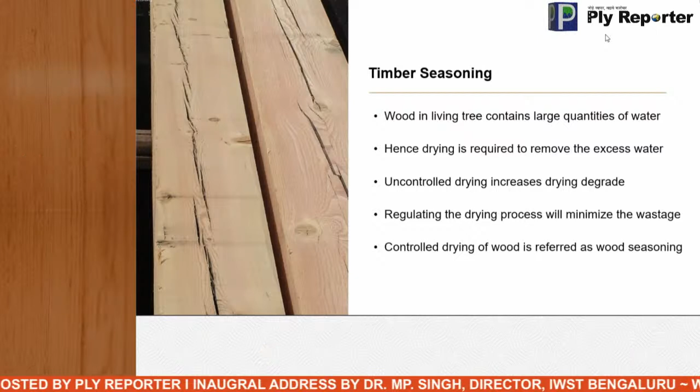Hence this water needs to be removed, because wood has all the inbuilt materials for sustaining living organisms, particularly fungus and termites. It contains cellulose, which on degradation can produce glucose, a source of food for insects and fungus. Oxygen is plentifully available, and if there is water, all three make wood very conducive for survival of any organisms. That's the reason wood can be degraded very fast if not protected properly.

So while there are different options to protect the life of wood, the easiest way is to eliminate one of these three requirements for survival of insects and fungus. Food source cannot be eliminated, and oxygen we cannot eliminate, we can just stop it with some coatings. So the easiest way is to limit the moisture availability.

If you can restrict the availability of moisture in the wood, then we can prevent the wood from a lot of organisms. So removing the moisture, although wood drying seems a very simple concept, if you don't control it, it can lead to unserviceable material.

Regulating the drying process is all about wood seasoning, and there is a slight difference between wood drying and wood seasoning. Anything can be dried, but at the end of drying we are not sure what material we'll get - it may be degraded or may be in good condition, depending on the wood material. When we talk about seasoning, we always control the drying process, so that the end product is degraded to the least possible extent.

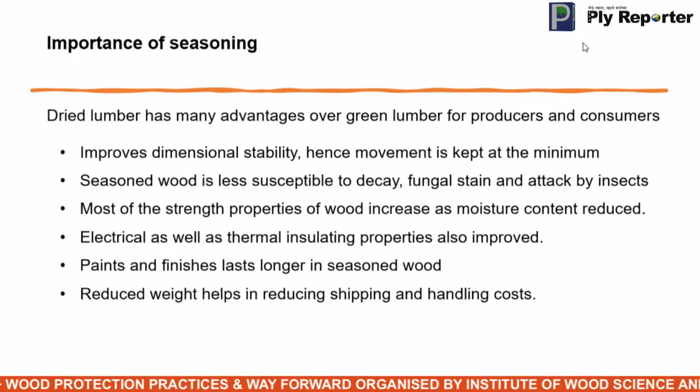As far as the importance of seasoning is concerned, it has many advantages, both from the perspective of producers as well as consumers. From the producer's perspective, if you remove the moisture, it can help in shipping and handling cost, because instead of carrying the wood, if you don't season it, you will be carrying a huge quantity of water from one place to another, which is of no use.

But besides that, as far as application is concerned, dimensional stability is the important aspect which can be taken care of by wood seasoning. Seasoned wood is very, very less susceptible to decay, fungal stain, and attack by insects. So when you talk about wood protection, even 50 to 60% of the protection measures can be taken care of by just following wood seasoning itself.

Interestingly, most of the strength properties increase as we reduce the moisture content of the wood, and the thermal and electrical properties also get improved.

Most paints and varnishes last longer if you dry the wood, because if you put all these finishes on wet wood, the life of the finishes will be very, very less.

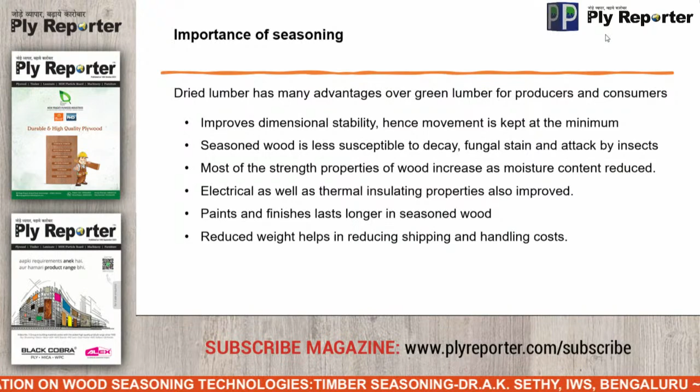Properly dried timber can be cut to very precise size, because the dimensional stability has already been ensured, so we can stick to our required dimensions, and it can be machined more easily and efficiently. The parts can also be secured very precisely with the help of fasteners, adhesives, as well as bolts.

Most of the drying degrades, like what we encounter during service, can be minimized if we follow wood seasoning practices before putting any wood into use. And the most important thing is, when you talk about wood preservation, most preservative treatment methods require very low moisture content in the wood. Hence, wood seasoning is one of the prerequisites for most preservative treatment, as well as fire retardant treatment methods.

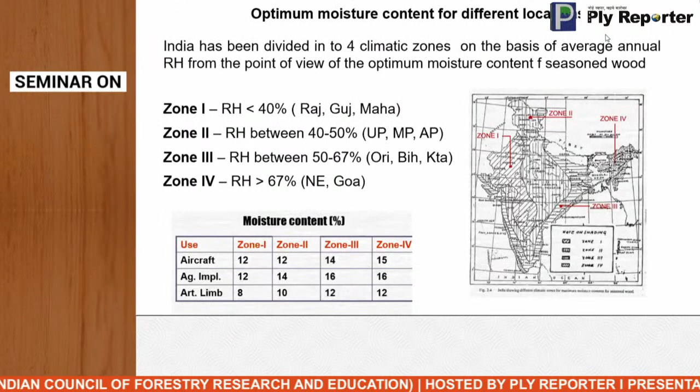If seasoning is very essential, then what is the optimum moisture level we should follow? Removing moisture in the beginning, when the tree is green, reducing the moisture from green condition to maybe 20-25% is not very energy intensive. However, if you go below 25%, for every percent decrease in moisture content, we have to put in a significant amount of energy. So what should be the minimum value to which we can suggest drying the timber?

This entire country has been divided into 4 zones: zone 1, zone 2, zone 3, and zone 4. These classifications are mostly based on the prevailing relative humidity in those areas. In zone 1, the average relative humidity is less than 40%, in areas like Rajasthan, Gujarat, and Maharashtra.

In zone 2, the relative humidity varies. This is not diurnal variability, it is the average variability for that particular area. So in zone 2, the range varies between 40 to 50%, then 50 to 67% in zone 3, and in zone 4, more than 67%.

So what is the necessity of this zonation? If you don't classify by zone, for example, if you want to use wood in zone 4, there is no need to dry the timber to a very low moisture content, because if you dry it, it is again going to absorb moisture from the surroundings. So we would be putting huge amounts of energy to remove the moisture, but that energy gets wasted, because the wood will again absorb moisture from the surrounding.

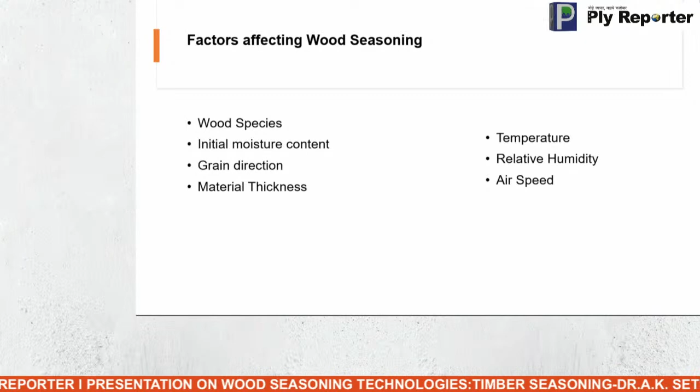When we talk about material factors, they are nothing but the wood species, their initial moisture content, how the sample has been cut, and the material thickness, because thicker the material, it will always be difficult to dry. We don't have much control on all these aspects except material thickness, but when we have a specific end use, we don't have a choice for material thickness either.

So the species, that is the material, is already fixed. We have only control over the processing parameters during seasoning, that can be temperature, relative humidity, and air speed. These are the primary controlling factors we always regulate in the drying kilns to have a better drying material. The species we cannot change, the material properties we cannot change.

However, the species have been classified into different categories depending on their seasoning behavior. They are classified as class A, class B, and class C, depending on how easily we can dry the species. Depending on the refractoriness of the species to drying, the species have been classified, and it's already been enlisted.

So whenever we take any species for drying, the desired protocol may be followed. No need to develop the protocol or schedules every time. It's already there. If you know the species, we can refer to the schedules and follow the schedule practices, so that we can have a material with better properties with less degradation.

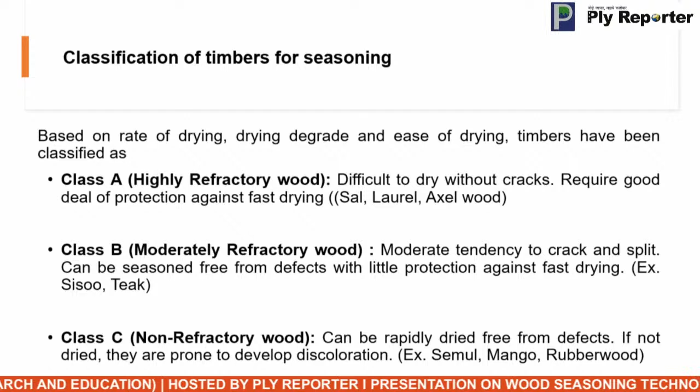But as I mentioned, the external factors where we can control, the combination of these three factors like temperature, humidity, and air speed, can be very complicated if somebody wants to start a drying process. So in order to avoid those complications, seasoning schedules have already been developed based on the species as well as the refractoriness. There are 8 schedules already recommended in the Bureau of Indian Standards, IS 1141/1993.

These schedules have been optimized for each species of timber, and the timbers have been classified into different groups. Depending on the class of timber, we can select the schedule. So a schedule is basically an optimum set of conditions between temperature and relative humidity with respect to the moisture content of the wood.

So we have to just select the species and find out the suitable schedule and follow those schedules for drying. If you follow this, at the end, we can ensure that our material has been properly dried and has encountered very little degrade.

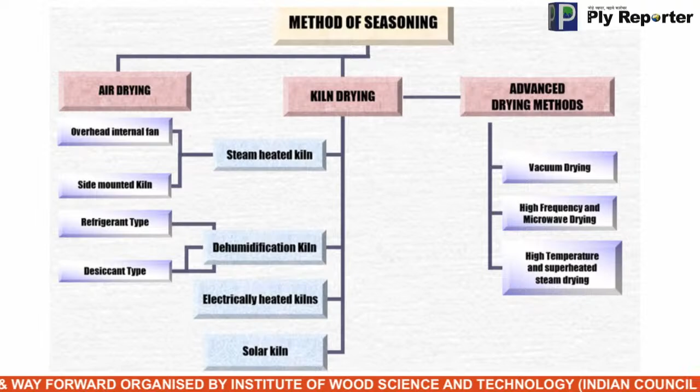But where we have control, we call it kiln drying. In kiln drying, as I mentioned, we have the possibility to control either the temperature, humidity, or even the velocity of air, because air works as a medium for taking out the water from the wood to the outside of the kiln. So there are different kiln drying methods.

In India, most drying is done with steam heated kilns, although dehumidification kilns are also used to a certain extent. Electrically heated kilns were used in the beginning, but because of higher cost of electricity, it may not be very economical. However, it can be clubbed with solar kilns in the form of a hybrid drying system. These are the traditional kiln drying methods we follow in India.

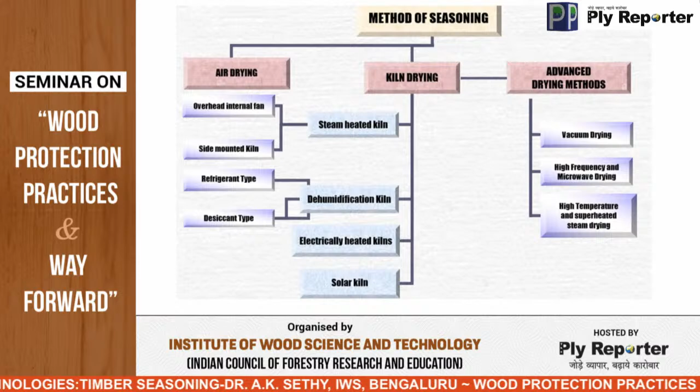Besides, there have been new inclusions into these processes like vacuum drying, where the pressure can be reduced inside the chamber to facilitate faster moisture removal. In recent years, we are also venturing into high frequency and microwave drying, where the material can be dried at a faster rate, but they have certain limitations because of capacity. Still, in India, I think it is in the nascent stage, and research inputs are needed to make it commercial. So the first and easiest way to dry timber is by air seasoning.

As I mentioned, in air seasoning, all the natural parameters available in the atmosphere, like temperature, humidity, and wind speed, are used for drying timber. Because it is air dried, we are not putting any extra energy in terms of heating or circulating air. This is the most economic method of drying. However, as I mentioned, we don't have control, so sometimes the process can be very long, and it can take 3 to 6 months depending on the place where it is practiced.

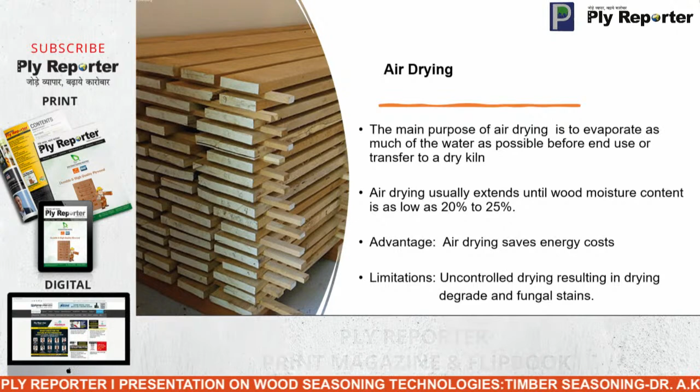But in the Indian context, being a tropical country, we have good access to solar radiation, and the average temperature in most parts of the country is around 25 to 30 degrees centigrade. So this can be utilized. The advantage of tropical climate can be utilized for practicing air drying, which can be more economical.

There are different air drying sheds depending on the refractory classes, as I mentioned in the beginning. These drying sheds can be fabricated at very low cost, and depending on the species used and the location, the shed type can be decided to help facilitate air drying.

But as I mentioned, in kiln drying we have all the control measures. We have regulation for temperature, humidity, and air speed. In most of the schedules in Indian standard, they range between a temperature of 38 to 68 degrees. However, in other countries, even high temperature drying up to 100 degrees can be followed for faster drying. So kiln drying definitely provides better opportunity to control the drying process, so that we minimize drying time and maximize recovery without much degradation.

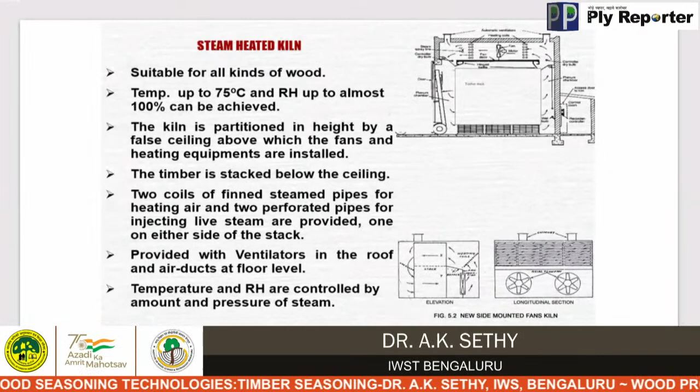As I mentioned, the most prevalent drying kiln followed in India is steam heated. As the name suggests, the heating medium is steam, and we can achieve temperature up to 75 degrees, and humidity up to 100 percent. With these two combinations, we can control the drying process depending on the species used. So drying time can range from 8 to 15 days depending on the species as well as the temperature we are following.

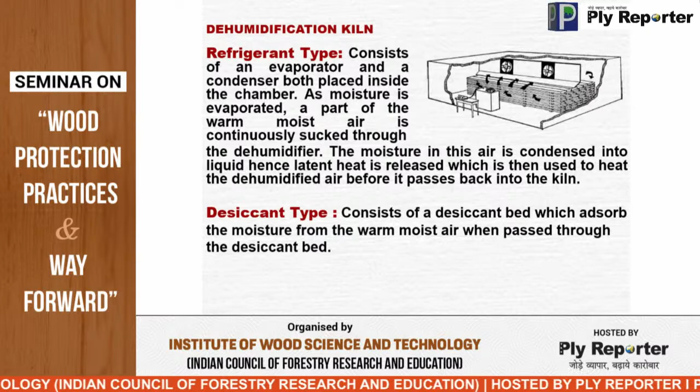Dehumidification drying is a little bit advanced version of kiln drying, because here instead of venting the energy, when we remove moisture from the wood in a normal kiln, we vent the moisture outside the chamber, and in the process we also vent some of the energy out. So in the dehumidification kiln, we trap part of that energy inside the chamber, so that while venting out, we don't lose most of the energy. That's why it is more energy saving compared to normal traditional drying methods.

There are different types of dehumidifiers available based on refrigerant or desiccant types, and these are commercial, available in the market.

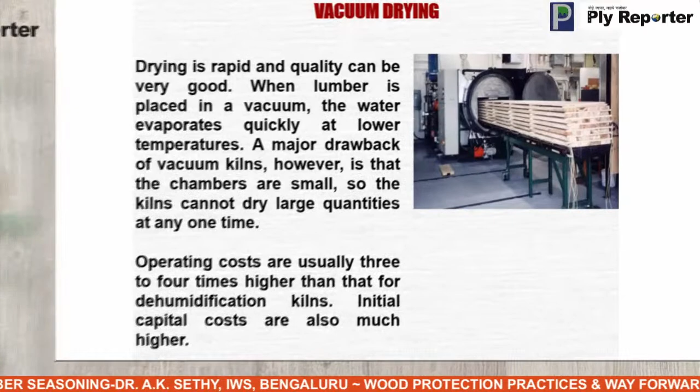Vacuum drying is one of the fastest drying methods, and we can dry the timber even in 3 to 4 days depending on the species. The time can be substantially reduced by 30 to 40%. But the operating cost is also a little bit higher, because the initial cost is also a bit high.

Besides these three methods, as I mentioned in the beginning, there are other different methods like high frequency drying, which can have the advantage of both drying as well as sterilizing the timber from the perspective of quarantine. But these methods are still in the initial stages, so a lot of research inputs are needed to make these processes commercial.

So if you talk about the comparative performance of different types of kilns, of course air drying can take more than 3 to 6 months, but steam heated kilns take 10 to 15 days. Dehumidification drying, again, is 12 to 18 days.

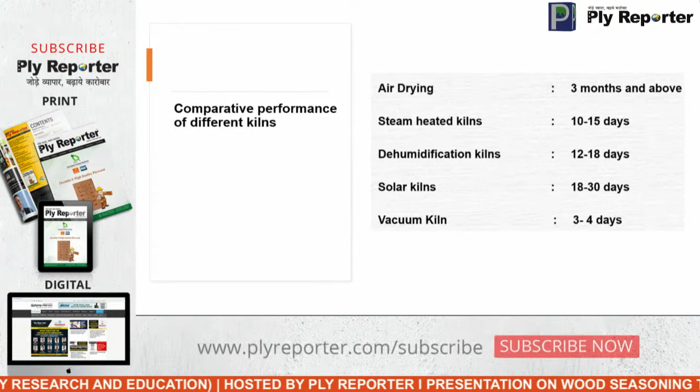Solar kilns, this is one of the potential methods I'll just highlight at the end. This can be one of the solutions for the Indian context. Although the drying time is more, it can prolong for 18 to 30 days, but this can be minimized by combining with a hybrid system.

And vacuum kiln drying takes only 3 to 4 days. So this is a comparative performance of how the different kilns behave when we dry timber.

As far as energy consumption is concerned, conventional drying methods are a little bit more energy intensive. For unit per kg of water, they need around 1.3 to 1.4 kilowatt hour of energy, with an energy efficiency of around less than 50%.

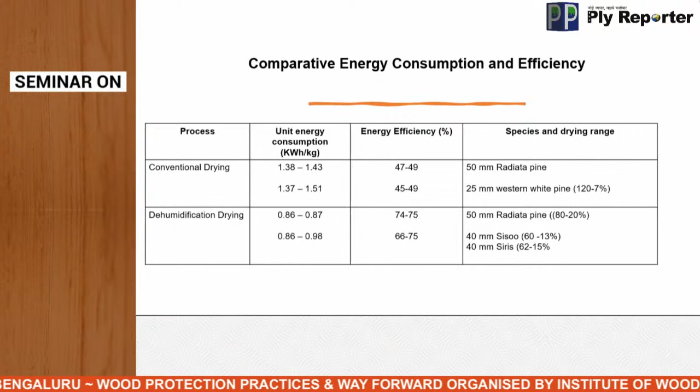But when you talk about dehumidification drying, the energy efficiency can be around 75%, with energy consumption of only 0.86 kilowatt hour per kg of water removal. So these are some of the benefits when you deal with wood seasoning.

Although we know that seasoning is the foremost step in wood processing industries, I don't think it is followed in true spirit, because there is lack of information about how to season the wood and what the Bureau of Indian Standards says. So sometimes we dry the timber and feel it has been dried properly, but we never know what is the moisture distribution in the timber itself, because if the distribution is not good, when we start using it, all the problems can start again.

So we are putting energy, but at the end we won't get material of desired quality, what we always aim for. Bureau of Standards always recommends what should be the distribution pattern in the dried material, but I don't think hardly any small industries are following the exact practice, because we always remove the moisture, but we don't know how the moisture distribution pattern is and how the stresses are built up.

So when you talk about opportunities, of course this is most important, but the most energy intensive processes in timber utilization can be 50% of the total energy consumed in the entire wood processing industries. Because of that, sometimes we neglect these processes to save cost in terms of energy.

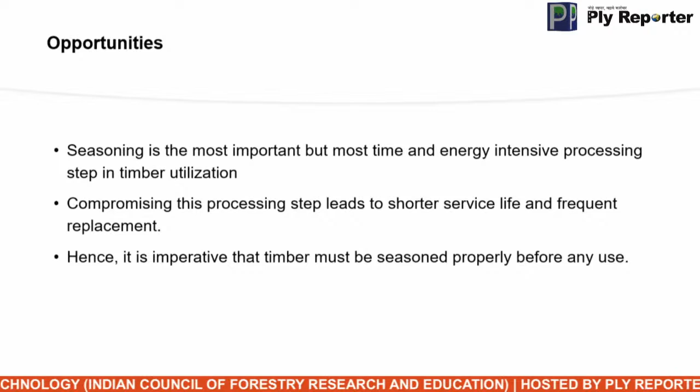However, if we compromise the processing steps, we'll always end up with material of poor quality, which will have a shorter life and need frequent replacements. So indirectly, it can have implications on forest conservation also. Hence, it is imperative that we should treat timber properly before putting it to any utilization.

But when everybody, all companies or individuals, should demand for seasoned material, then the next question comes: how can we facilitate these processes. It is interesting to mention that being a tropical country, we have access to 5,000 trillion kilowatt hour of energy incident over Indian land area, with an average of 4 to 7 kilowatt energy per square meter. So this is a beautiful avenue which can be tapped for drying.

It can be done by different methods. For instance, we can install solar cells, heat water, and circulate it for seasoning. We can also go for the traditional solar kiln method, where chambers are built on the concept of the greenhouse effect. So there is good potential that solar energy can be utilized, because as we know, energy is the only inhibiting factor for drying.

If that energy can be managed from renewable sources without putting much cost, then it can be promoted easily. So there is huge potential that renewable energy can be utilized in wood processing, not only in seasoning, but even in other processing fields.

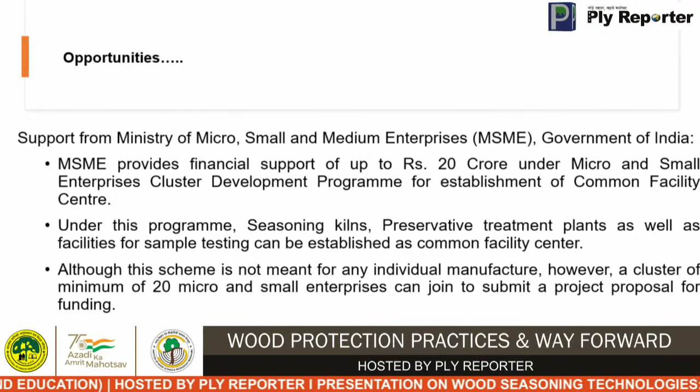And if that is not possible to some extent, there are possibilities from Ministry of MSME, Government of India, as our director has mentioned, to get funding and establish seasoning facilities. Not only seasoning, even all woodworking facilities, but from a preservation perspective, seasoning and wood preservation are very, very important.

MSME provides financial support up to 20 crore for development, based on a cluster development program. Although these programs are not meant for individual manufacturers, if there is a cluster of around 20 micro, small and medium enterprises, with a group of minimum 20, they can join, make a consortium or association, and approach MSME for financial support for development of facilities like wood seasoning kilns and preservation plants.

And it can be a common facility center, so everybody can access those facilities and utilize them for processing wood for better durability.

In this context, IWST can provide most of the technical support in preparing the project, particularly pertaining to wood seasoning and preservation. Once the project is funded and installed, it can be sustainably utilized by all the members, and there is no restriction on the maximum number of participants who can join this consortium.

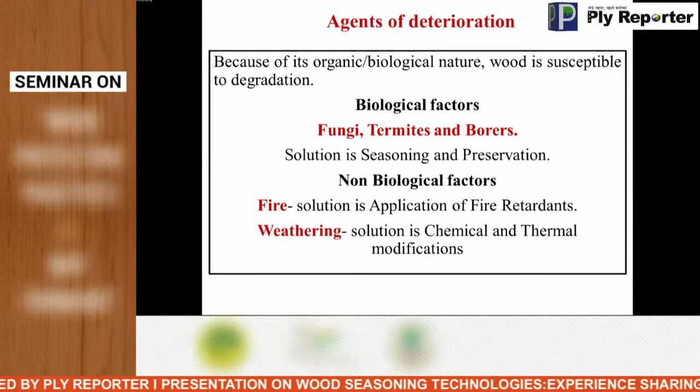Agents of deterioration: because of its organic or biological nature, wood is susceptible to degradation. Biological factors are fungi, termites, borers - the solution for this is seasoning and preservation. Non-biological factors include fire, where the solution is application of fire retardants, and weathering, where the solution is chemical or thermal modification.

Need for preservation: why do we have to preserve wood? Natural durability is the inherent ability of timber to resist degradation. In most timber species, sapwood is non-durable and needs preservation. Non-durable timbers, when suitably treated, would give adequate life under service conditions.

Wood preservation is the art of preserving timber against fungi and insects. Wood preservatives are chemical constituents that when applied to wood make it resistant against fungi and insects. It forms a very important part in the processing of timber, thereby conserving the material resources of the country.

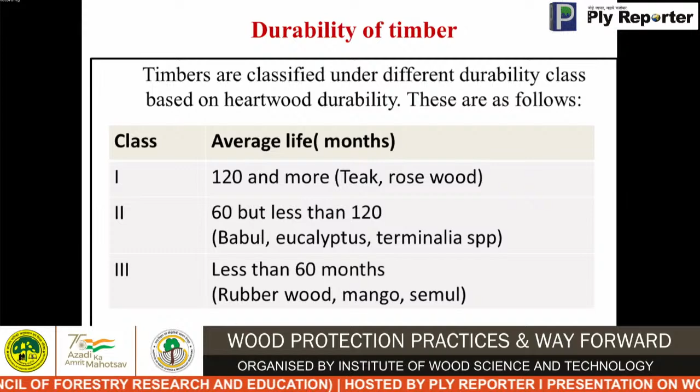Durability of timber: timbers are classified under different durability classes based on heartwood durability. Class 1 is 120 months and more, with higher durability - examples are teak wood and rosewood. Class 2 is 60 but less than 120 months, such as babul, eucalyptus and terminalia species. Class 3 is less than 60 months, such as rubber wood, mango and semul.

Selection of preservatives is very important. It depends upon the properties of the wood to be treated, the anticipated service life, and the properties of the chemical formulation. The wood preservative formulation must be toxic to fungi, termites and borers. It should be chemically stable, safe to handle, should not have any corrosive properties, and the permanency of the wood preservatives in the treated wood should be high.

So what types of preservatives are generally used? The oil type should be applied for dry wood, not green wood. That is coal tar, creosote is an example. Organic solvent preservatives for dry wood include copper and zinc naphthenates.

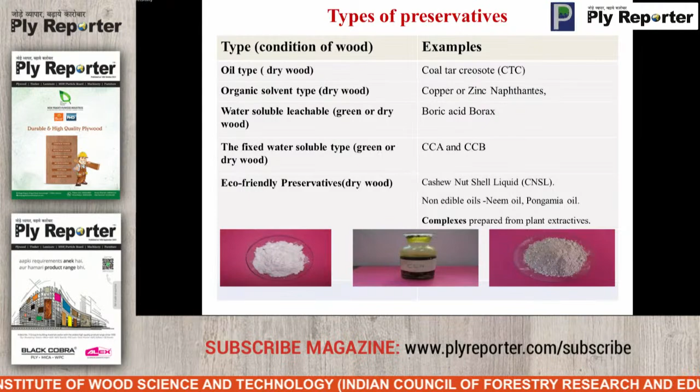Widely used water soluble preservatives are chromated copper arsenate, chromated copper boric acid, acid copper chromate, alkaline copper, quaternary compounds, borates, and zinc compounds. These are all generally used water soluble preservatives.

What are the advantages? These preservatives can be transported in a solid or concentrated form. Wherever we are treating, we can dilute it. They can be dissolved with the cheapest of all solvents, that is water. They are very effective against both fungi and insects. They leave the wood in a clean condition and it is not unpleasant to handle.

There are new generation wood preservatives. Borates include formulations prepared from sodium tetraborate, sodium pentaborate, boric acid, but the most common form is disodium octaborate tetrahydrate, and Zyvoc, which is a composite of zinc, boron, copper and azoles. These are the new generation wood preservatives.

Ammonium-based preservatives are also there. Alkyl ammonium compounds are new biocides effectively used in New Zealand, Europe and America. They have both fungicidal and insecticidal properties. Combination of alkyl ammonium compounds with copper and ammoniacal solutions improves the performance of timber in ground contact. This formulation gives protection equal to that of CCA.

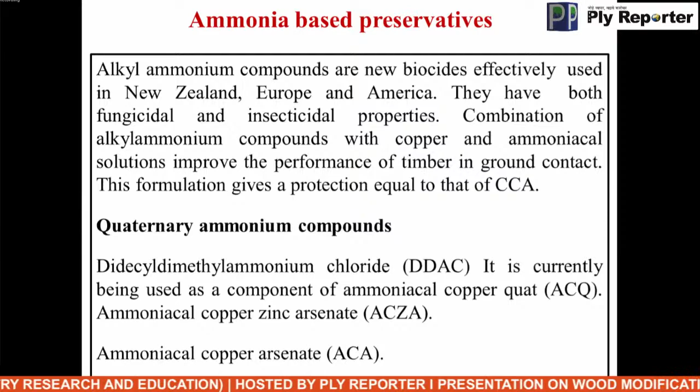Quaternary ammonium compounds, that is ACZA and ACA, ammoniacal copper zinc arsenate and ammoniacal copper arsenate. Micronized copper azole, MCA, is a waterborne dispersion of submicron particles of copper compounds in azole. They have lower copper leaching form in treated wood, low corrosiveness to metal fasteners and connectors, lower solubility, and are relatively less expensive.

Recent developments are in nano preservative coating systems. Nano based coating provides superior UV and weather resistance. It is easy to clean, antimicrobial, scratch and abrasion resistant. Nanoparticles used for wood preservation and UV resistance include nano zinc oxide, nano copper oxide, and nano titanium oxide.

Wood consists mainly of cellulose, which is combustible. So fire retardants are generally prepared from mono and diammonium phosphates, ammonium sulfate, borax, boric acid, zinc chloride, nano silicon oxide, and mineral materials like nano clay can be used as fire retardants.

Eco-friendly preservatives include natural wood preservative formulations from cashew nut shell liquid (CNSL) with inorganic components like copper, and eco-friendly preservatives based on seed oils and plant extractives. Pongamia oil shows promise. Wood and bark extractives of eucalyptus species and Lantana camara with inorganic components can be used as eco-friendly wood preservatives.

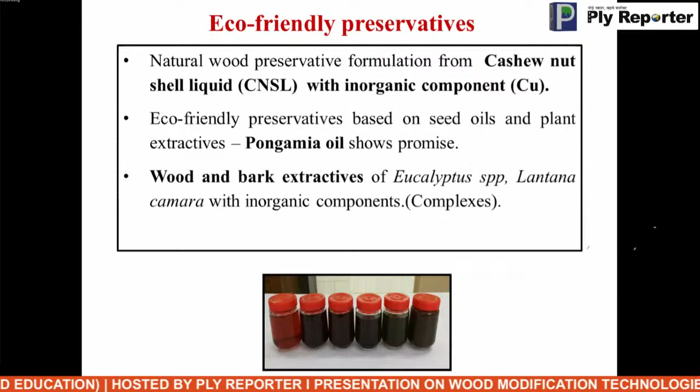The selection of the appropriate preservative and treatment method depends on various factors. Condition of the wood, whether it is green or dry, that is whether it has more moisture content or is dried or just felled wood, we have to see. Treatability factor of the wood must be considered. Treatability of hardwood is classified A to E, from non-refractory to refractory, that is easily treatable to very difficult to treat.

End applications matter, whether it's used in ground contact, exposed to atmosphere, or under cover, structural or non-structural, handicraft unit or food containers. We have to select the preservative based on the end use. Quantity to be treated and available time also must be considered, how much quantity we have to treat. Based on that, we choose the methods of preservation and the preservatives.

Wood preservative treatment methods are: first, prophylactic treatment, a basic remedial treatment. Second is diffusion process. Third is dipping or soaking. Pressure treatment is for dry wood. Sap displacement method is for green wood. Boucherie method is for green wood. These are the general preservative treatment methods.

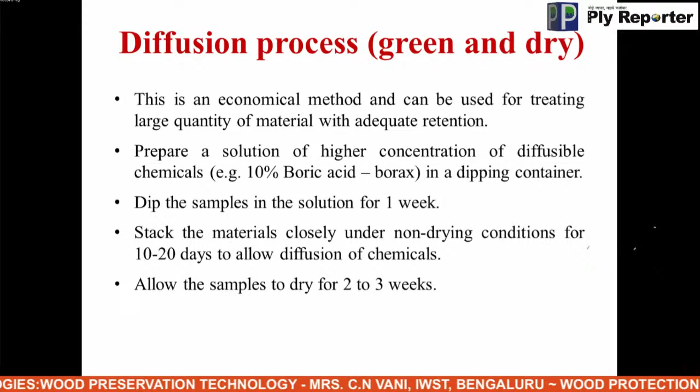Diffusion process can treat both green and dry wood. This is an economical method used for treating large quantities of material with adequate retention. For this, prepare a solution of higher concentration of diffusible chemicals, for example 10% boric acid-borax, in a dipping container. Dip the samples in the solution for one week. Then stack the materials closely under non-drying conditions for 10 to 20 days to allow diffusion of chemicals. Allow the samples to dry for 2 to 3 weeks.

Next is the pressure method. The main steps followed in the full cell process are: preliminary vacuum period, fill the cylinder with preservatives, build up the pressure, note the maximum pressure held, release the pressure, empty the cylinder of preservative, final vacuum period, and release the vacuum. The maximum pressure held depends on the species and its treatability.

Next, the Boucherie process. Dr. Boucherie of France developed this process for treating green timber or bamboo. This is the most commonly used sap displacement technique, where bamboo can be treated quickly in large numbers. It consists of a storage tank of 30 to 50 liters capacity where preservative solution is stored. At the bottom of the container, a main pipe is attached, connected with a divisible pipe with a stopcock and a rubber tube of different girth, where the pole is supposed to be attached.

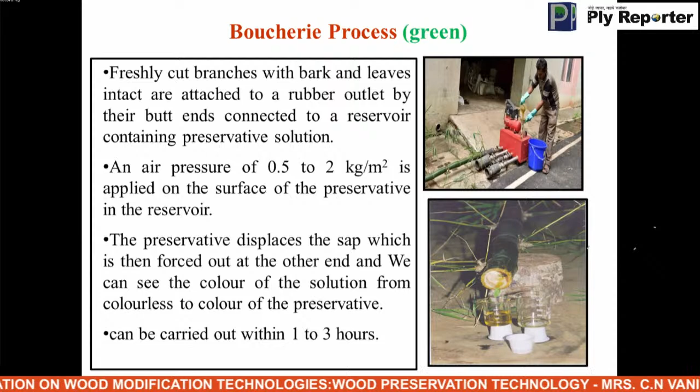This is for green condition only. Freshly cut branches with bark and leaves intact are attached to a rubber outlet, with their butts connected to the reservoir containing the preservative solution. An air pressure of 0.5 to 2 kg per square meter is applied on the surface of the preservative in the reservoir. The preservative displaces the sap, which is then forced out to the other end. We can see the color change from sap to preservative color, that is, colorless to the color of the preservative. This process can be carried out within 1 to 3 hours.

So we can see the color change, with the colorless sap dripping out and the color of the preservative appearing.

Advantages of pressure treatment over non-pressure treatment: deep uniform penetration and absorption can be achieved. It is a faster and more reliable process, more easily controlled and regulated, and conditioning time can be reduced.

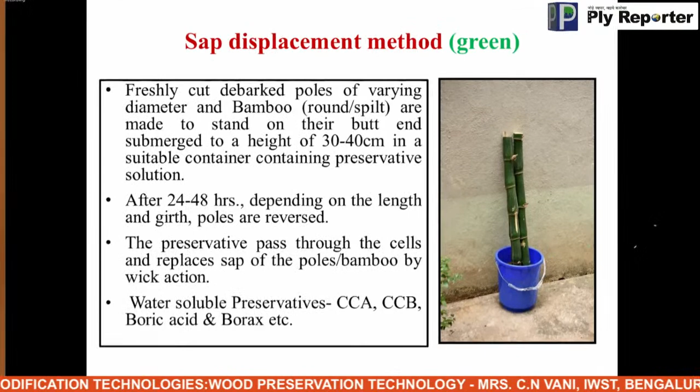Sap displacement method for green bamboos or green poles: freshly cut, debarked poles of varying diameter, round or split, are made to stand on their butt ends, submerged to a height of 30 to 40 centimeters in a suitable container containing preservative solution. Nearly one-fourth of the length of the bamboo should be submerged in the preservative solution. After 24 to 48 hours, depending on the length and girth of the poles, it has to be reversed. If the length is less, 24 hours is enough; if the length is more, 48 hours is required. The preservative passes through the cells and replaces the sap of the poles by wick action.

Water-soluble preservatives like CCA, CCB, boric acid or borax can be used here. Organic solvent or oil type preservatives cannot be used; only water-soluble preservative is to be used.

Next, advantages of the sap displacement method: this method is very simple, avoids elaborate treatment procedures, treatment plant and skilled manpower, and can be carried out at the felling site itself. Highly refractory species like casuarina, eucalyptus and bamboo can be easily treated by this method.

After all these processes of treatment, conditioning is a very important part. After preservative treatment, samples should be allowed to dry under the shade for proper fixation of preservatives, stacking properly with crossers for uniform air circulation to be maintained. This will ensure the fixation of the preservatives inside the wood.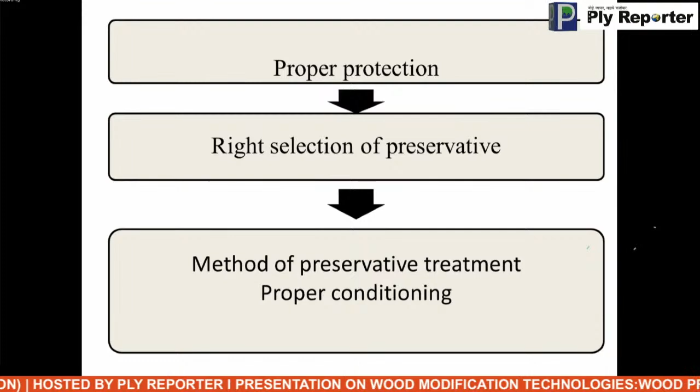So for proper protection, right selection of preservative, method of preservative treatment, and proper conditioning are the very important steps. If you follow these three methods, then proper protection is achieved. Thank you very much.

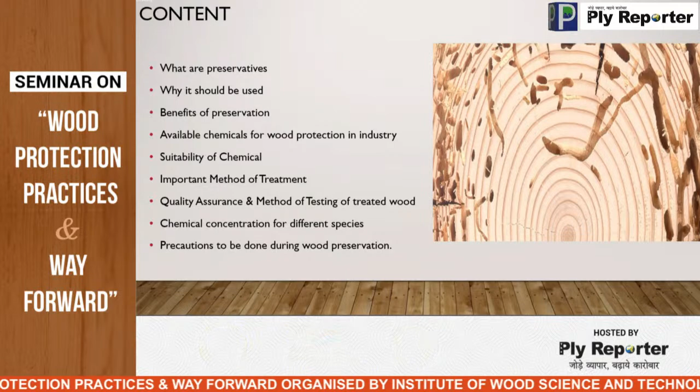So I think the previous speakers and previous panelists already shared their experience. So here I will share one presentation, and Mrs. Bani also shared this in her presentation. What is the good practices and what should be done in the industry? As already discussed, that industry is not following the good practices, and very few industries are following the system, following the good practices. So here I would like to share some good practices which industries should follow. And as already Mrs. Bani shared her presentation, and she has already mentioned about some few basics, so I'll skip there, and I'll be focusing more on my experience and what the industry practices.

So in my presentation, it includes what are preservatives, and I'll be talking very less about it because already it is mentioned. Why it should be used, as already mentioned. Benefits of preservation. Available chemical for wood protection in industry, like there is a lot of chemical available in the industry, but what industry is following, what industry is using, and the suitability of chemicals, it is also covered, but I'll share my view here. And important method of treatment, what industry is following. Especially I'll be talking about North India and the export industry, furniture exporting industry, because most of these good practices are being followed by export industry because of their clients. Like as already Mr. Anil said, that because of exporting, the importers from the USA and Europe, they are pushing our industry to follow this type of good practices and follow the systems.

Like again, important, quality assurance and method of testing of treatment wood. Like as Mr. Anil also said, quality assurance, how we assure the quality of the preservation, the treatment method, whether we are doing the right process or not, and the method of testing, how we will test, because this is a scientific approach. Otherwise the industry just has a preconceived mind that okay, it is done. And then the workers, it depends on the workers' experience. If the worker is experienced, then the quality of the treatment will be good. If the experience is not good, then it will affect the quality of the treatment also. And the chemical concentration for different species, and some precautions to be done during preservation.

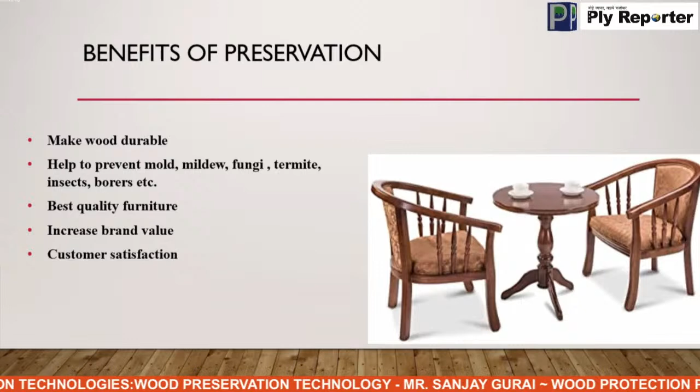I'll share some benefits: to make the wood durable, to help prevent mold, mildew, fungi, termites, insects, borer, etc. These are the decaying agents, as well as to enhance the quality of the furniture. Because as a wood industry, when we are selling furniture and it is going to the customer and they are using it, maybe after 6 months there is a borer in the furniture, then the customer dissatisfaction will be there. So to increase the quality, we should prevent the wood from this type of wood fungi and wood insects, and we need to preserve the wood.

Wood preservation should be done. It also increases the brand value.

Why are industries in North India doing these practices? Because brand is involved. Some international brands, as you know, West Elm, Pottery Barn, Crate and Barrel, Zara Home, H&M - all these brands are pushing their exporters, pushing their vendors to follow this system.

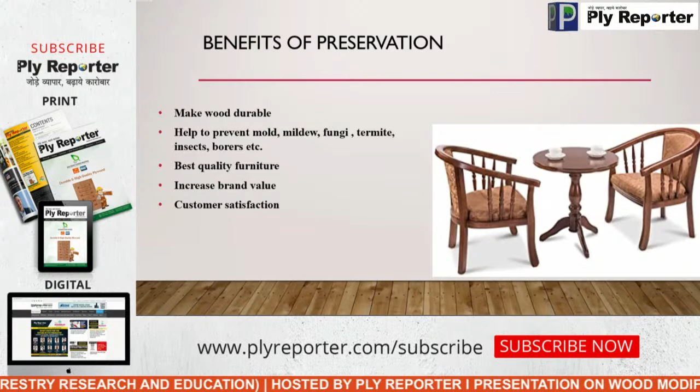I would say that only when the importers are pushing, when the brand is pushing us, then only we'll follow the practice. This is not good. Actually, all industries should follow these practices.

As well as there is another benefit, that is customer satisfaction. When we are selling furniture to our customers and they are satisfied, then it is good for the brand, good for the company also. This is actually a sustainable method of doing business. Mrs. Bani has already said what is wood.

I will tell only the available chemicals which are used in industry. I will not go into the details. Mrs. Bani has already mentioned what chemicals are available. I will only focus on those chemicals which the industry is using.

Creosote oil - industry is using this, like wood preservative oil, linseed oil preservative - some industry is also using this. And in North India, for exporter industries of solid wood furniture, biflex is widely used. And recently, for the last 5 years, people have shifted from biflex to few other chemicals.

I won't say that everyone has shifted. A few industries have shifted to borates, like disodium octaborate tetrahydrate. I'll mention why here - I'll be sharing in a later slide why people are using disodium octaborate now, and a few industries are using boric acid also.

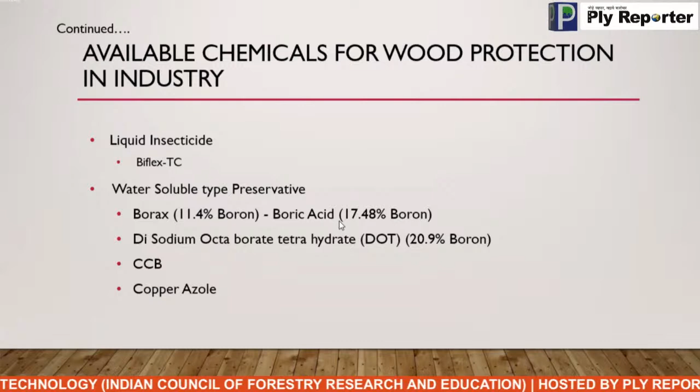Next I will share some important method of treatment. Here I will only focus on the full cell method. This is the method which industry should follow. According to the available methods, it is the best method I can say, and industry should follow this one. Definitely there are some disadvantages also - it is capital intensive, but still I'll recommend that this process should be followed.

Without pressure treatment, brushing, spraying, dipping is the process industry follows, but as industry is growing, we should follow the pressure treatment method.

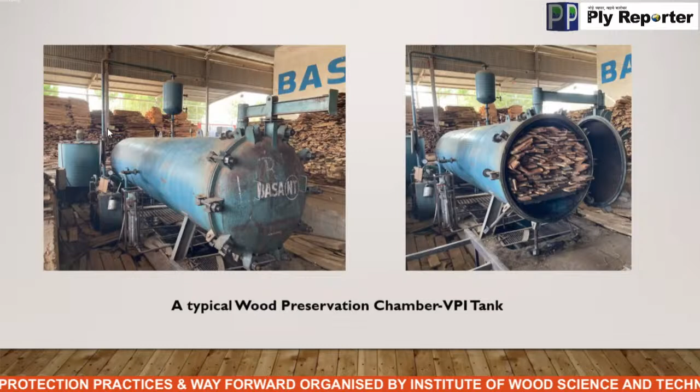First the chamber is loaded, then a vacuum is applied, around 600 mm of Hg, for 30 minutes. After that, when vacuum is applied, chemicals are impregnated - there is a tank and a lock here. After vacuum is done, chemical impregnation is done. After chemical impregnation, the lock is again locked, and pressure is applied.

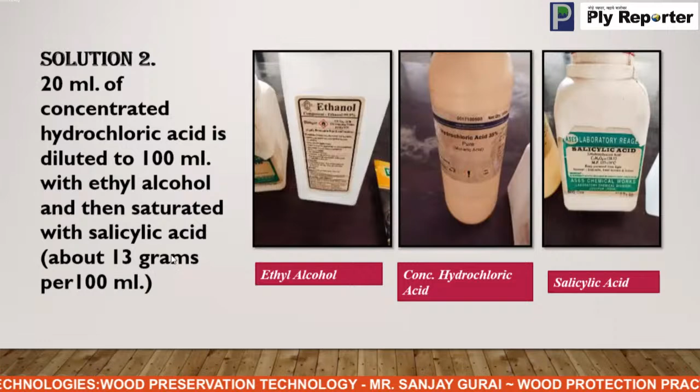Then you can say that wood is treated properly. If it is not, as in the earlier photographs I showed, if it is not turning to red color, then it is not treated properly. So this is the practice which I will say every industry should follow for better quality control, like retention, calculation of retention.

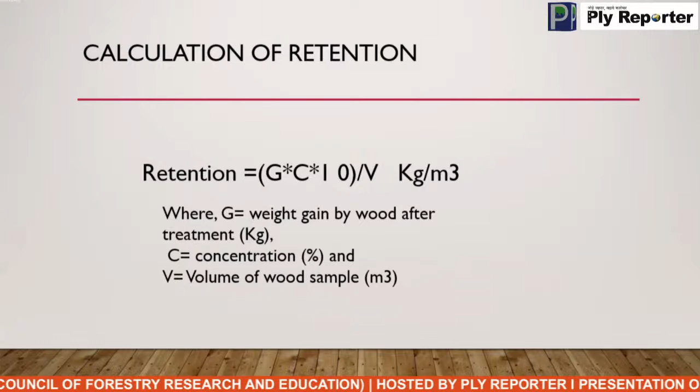इंडस्ट्री के पास रिकॉर्ड होना चाहिए कि वो जितने भी लॉट्स की रिटेंशन कर रहे हैं उसकी डेटा मेंटेन होनी चाहिए, कि डेली डे टू डे क्या रिटेंशन रहा है, वेदर इट इज एक्चुअल, मतलब रिटेंशन सही से हो रहा है कि नहीं हो रहा है।

ये भी फॉलो होना चाहिए। अनिल जी का जो कंसर्न था कि इंडस्ट्री में शुरू में 3% या 4% से कंसंट्रेशन किया जाता है, अगले दिन जब टॉप अप कर रहे हैं तो वेदर द केमिकल कंसंट्रेशन इज मेंटेन्ड और नॉट, इसके लिए एक बहुत सस्ता इक्विपमेंट है - हाइड्रोमीटर - बट मोस्ट ऑफ द इंडस्ट्री इज नॉट यूजिंग दिस। सिंपल हाइड्रोमीटर से पता चलेगा कि कंसंट्रेशन एक्चुअल है या रिक्वायर्ड कंसंट्रेशन से कम है।

सबसे लास्ट में कुछ प्रिकॉशंस बताता हूँ जो इस पूरे प्रोसेस में लेने चाहिए। जैसे कि जो VPI टैंक है उसका प्रॉपर टाइमली एंड रेगुलर चेक होना चाहिए कि उसके अंदर प्रेशर कितना जाता है, क्योंकि अगर कोई एक्सीडेंट होता है तो इट कैन क्रिएट अ ह्यूज हार्म। सो ये एक चेक पॉइंट होना चाहिए - टाइमली चेक करना और उसका कैलिब्रेशन भी करना, जैसे प्रेशर गेज है, वैक्यूम गेज है, उसका टाइमली कैलिब्रेशन इट शुड बी डन।

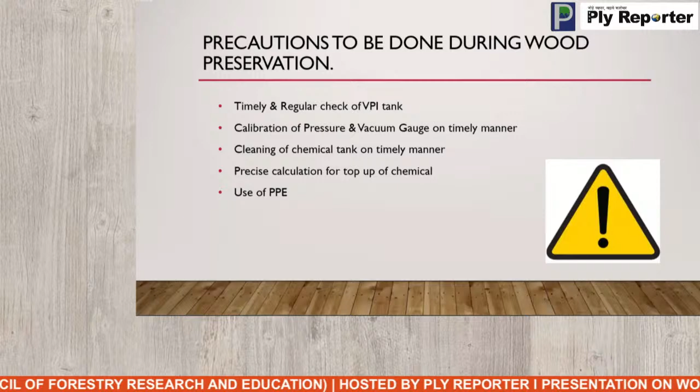एंड क्लीनिंग ऑफ केमिकल टैंक ऑन टाइमली मैनर। लोग क्या करते हैं कि एक दिन ट्रीटमेंट किया, क्योंकि जो एक्सेस केमिकल है एक बार भरने के बाद दोबारा उसी टैंक में जाता है, तो वुड के अंदर जो गंदगी थी, जो सॉडस्ट था, वो दोबारा वापस चले जाते हैं। तो अगर उसकी क्लीनिंग नहीं करेंगे तो नेक्स्ट टाइम जो केमिकल आएगा उसमें इम्प्यूरिटीज बहुत ज्यादा हो जाएंगी, जो पेनिट्रेशन को हिंडर करेगी, अल्टीमेटली क्वालिटी कंट्रोल में जो डिजायर्ड क्वालिटी चाहिए वो मिलेगी नहीं।

सो ये सब क्लीनिंग टाइमली होनी चाहिए, एंड प्रीसाइज कैलकुलेशन ऑफ टॉप अप ऑफ केमिकल। जैसे अनिल जी ने कहा है कि जब नेक्स्ट दिन, आज मेरे 3 साइकिल्स हो गए पूरे दिन में, तो नेक्स्ट डे जब मैं केमिकल का टॉप अप करूंगा तो सिर्फ पानी नहीं ऐड करूंगा। जैसे 1000 लीटर का पानी है, तो हो सकता है पूरा पानी खत्म नहीं होता, तो 100 लीटर पानी अभी भी नीचे पड़ा है।

तो दैट इज 100 लीटर केमिकल मिक्स्ड वाटर है, और जो 900 लीटर पानी ऐड कर रहा हूँ, उस 900 लीटर के लिए जितना केमिकल मेरे को ऐड करना है, मैं उतना ही करूंगा। तो यहाँ पे क्या होता है कि लोग 1000 लीटर के लिए कैलकुलेशन है कि 2%, तो गलती से 1000 लीटर के लिए कर देते हैं, लेकिन कैलकुलेशन 900 लीटर के लिए होना चाहिए - कि ऑलरेडी 100 लीटर केमिकल मिक्स्ड पानी मेरे पास है, सो मुझे बस 900 लीटर पानी के लिए कैलकुलेशन करना है।

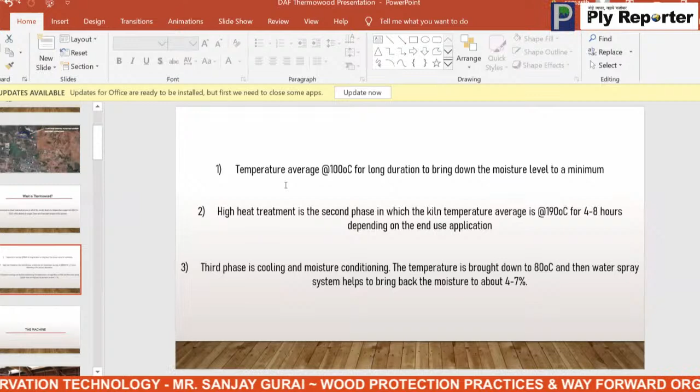And once you do this treatment, it is a three-step process. Basically, initially, the average temperature is kept at around 80 to 100 degrees for almost 13 to 15 hours, so that the timber doesn't immediately start cracking and doesn't bend and warp, because it needs to stabilize. The moisture needs to come out of the timber slowly and accurately.

Once we are sure that the timber has stabilized in the chamber, we increase the temperature from 100 degrees to almost 190 to 230 degrees, where we keep it for 4 to 8 hours, depending on the species that we are doing.

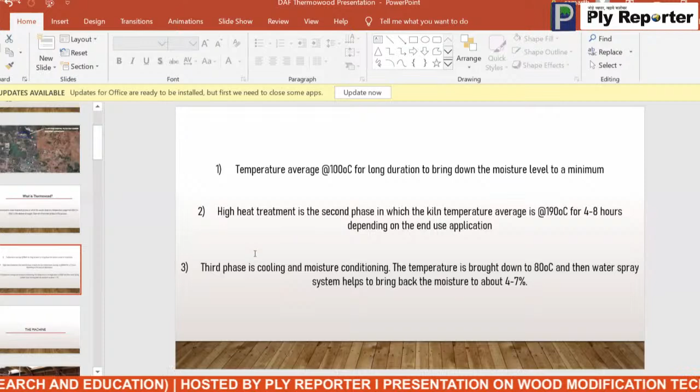Once that is completed, we then start the third phase, wherein we start cooling down and moisturizing it. Remoisturizing it is one of the most important factors, because if we do not remoisturize it, the timber generally tends to become very brittle and has the tendency to break up. So remoisturizing is done during the cooling period.

The better part of the treatment is you can actually control the color of the timber. You can choose what kind of color that you need. And also the better part is the color that is being done is completely uniform. It doesn't have patches or something like that. The color is completely uniform throughout the length and width of the species.

And you can choose whatever color you want.

The benefits, as people know, are that lowered equilibrium moisture content of thermowood makes it dimensionally very stable, and the material retains its shape far better than untreated wood, and it retains itself for a very long period of time. The outstanding dimensional stability allows thermowood to be successfully used in all climates.

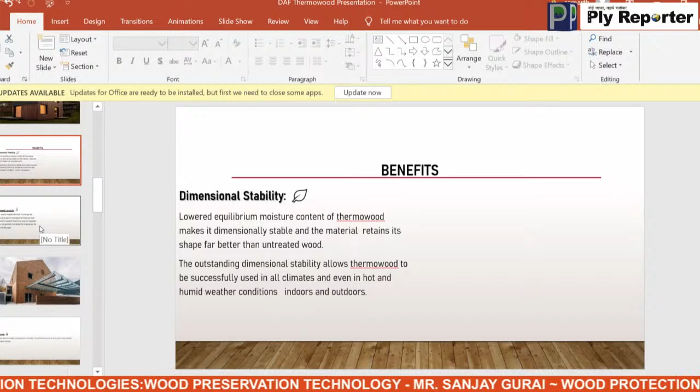It is not that you can use it in the south and you cannot use it in the north, or you can use it in the east or west. You can use it anywhere. Once thermowood treatment is done and thermally modified timber is produced, it can be used in any kind of atmosphere, whether it is a rainy atmosphere, cold atmosphere, or hot atmosphere. It doesn't make any difference to the timber.

When wood is treated with heat, its average lifespan is actually prolonged. It will depend on the exact heat the wood is exposed to. Species to species, it will vary. Generally, we have been doing a lot of mango, neem, pine. We have been continuously doing this, and we have got very good results out of it. We have been commercially trading it now, and we've been doing some projects which I'll show you at the end of my presentation.

This thermally modified wood doesn't react much to either temperature or humidity. It takes all challenges and remains stable.

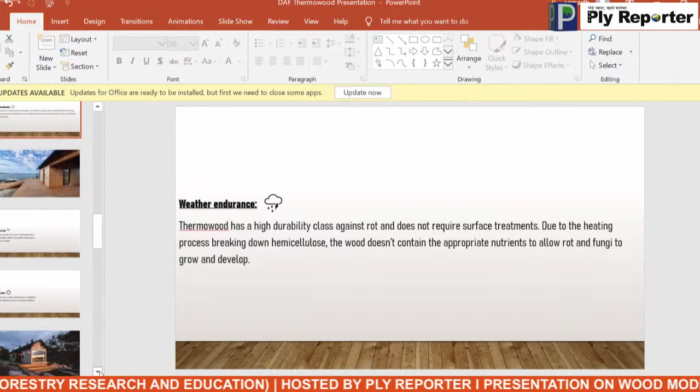The better part of it is because it is heated at such high temperatures, there are actually no resins left in the timber. As you know, the timber, when it is in the raw stage, and even after seasoning, the resins and glucose content in the timber remains inside, it doesn't come out. But during thermo treatment, because of the heat, the entire resin or glucose present in the timber is thrown out. It melts and oozes out of the timber, and whatever is left is pure timber. It doesn't have any resin or any glucose.

Hence, that assures that there is no glucose present for the termites to come and react and eat it. So when there is no chemical, no glucose inside, then the termite doesn't come and attack it.

Now, basically, what are the properties of thermowood? It improves durability against decay, reduces thermal conductivity. All the entire resin present in the timber is removed, reduces splitting strength, reduces slightly bending strength, improves dimensional stability, consistent color. This is one of the very important factors because it looks fabulous once you treat it. Even if you take timber like mango or neem, it looks very fabulous because it comes with a very beautiful color and the color is consistent. Reduced equilibrium moisture content.

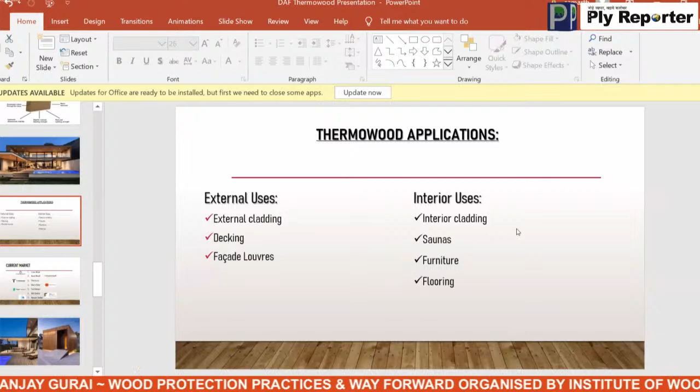Thermowood applications - where can we use thermowood? Technically speaking, you can use thermowood anywhere you can think of. You can use it externally for claddings, deckings, facade louvres, interiors, interior cladding, saunas, furniture, flooring, or any other application you can think of. Thermowood will remain stable continuously throughout a very long period of time.

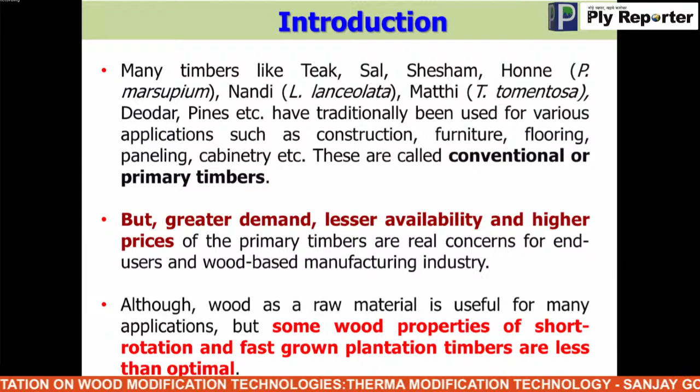My presentation - I am going to be very brief while talking about wood modification, a brief overview of the technologies existing in this area. As we have already talked about, conventional or traditional primary timbers like teak, sal, shesham have been used in the Indian environment for many years, but now because of their great demand, lesser availability and higher price, they are not being available much in the market, and we have to depend on plantation timbers.

As our director also underlined in the inaugural address, we are importing a lot of wood from different countries, particularly teak. We are also depending on trees outside of the forest, and these are plantation fast-grown timbers which are being used particularly for construction, furniture, and composite panel industries.

So here is the list of short rotation plantation timbers which are mostly available in our country. Because these are short rotation and fast grown, they contain a large amount of sapwood, and sapwood is not durable, unlike the heartwood which is present in very small quantity in plantation timbers. The quality of the sapwood is not up to the mark to be used directly without any processing in different industry sectors. So this kind of wood needs to be improved, and this is where wood modification comes into the picture.

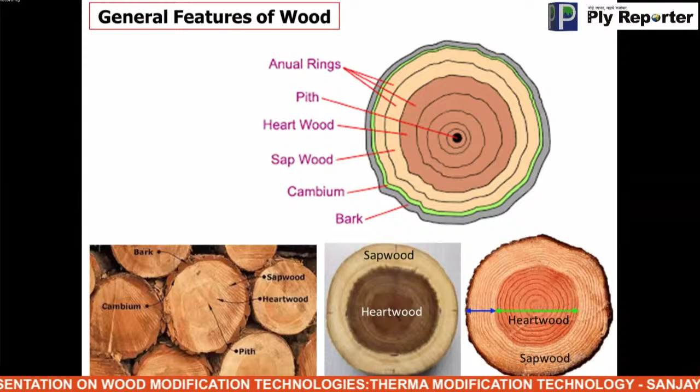Here I have shown the amount of sapwood which is mostly present in most plantation timbers - its quantity is quite high, and it is non-durable, as I mentioned, and earlier speakers also clearly told that preservative treatments are required. But most of the time these chemicals are hazardous and not environmentally friendly, and the properties are also not up to the mark, so we have to go for wood modification.

Here are some deficiencies in plantation timbers: they contain a high amount of sapwood, because of which the color is light, and durability is a question because it remains susceptible to rot and fungus attack. It contains a high amount of juvenile wood that gives variability in density, excessive shrinkage and swelling, which leads to dimensional instability, and finally results in warping and cracking in the wood. So we need wood modification.

Here is the definition of wood modification: it involves the action of a chemical, biological or physical agent upon the material, resulting in a permanent change to the polymeric chemical composition, with such change leading to desired property enhancement. This is where we are targeting - we need to change the chemical structure of the wood, and the modified wood should itself be non-toxic under service conditions, and furthermore there should be no release of any toxic substances during service or at the end, following disposal.

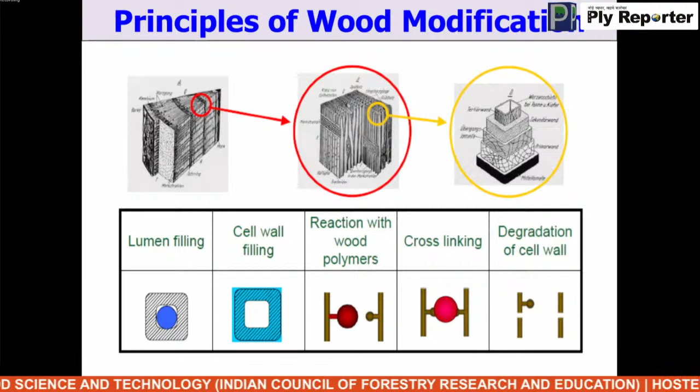This is just the microstructure of the wood, so I will not go into detail, but I want to pinpoint that when we do modification, we target either the lumen in the fiber or the cell wall. These are the two areas where major modification happens, and it creates a kind of cross-linking within the polymers of the wood, giving better quality wood.

There are different modification classes: chemical modification and impregnation, thermal modification as Mr. Sanjay Goyal has already talked about, and enzymatic modification. These are 4 different classes. Chemical modification includes acetylation and furfurylation. Impregnation and polymerization will be covered by the next speaker, Mr. Andy Pitman. Thermal modification has already been discussed by Mr. Sanjay Goyal, and enzymatic modification has already been done experimentally but no commercial method has been adopted.

Just to give a brief about acetylation: here acetic anhydride is taken as the primary chemical to treat the wood. This method is adopted particularly in Europe, and India is also importing a lot of this chemically treated wood under the names Accoya and Titan Wood, and it is commercially available.

Next is furfurylation. Furfuryl alcohol is a plant-based material, it is eco-friendly, and furfuryl alcohol treated wood is also available under the name Kebony wood, and it is being used in different industry sectors.

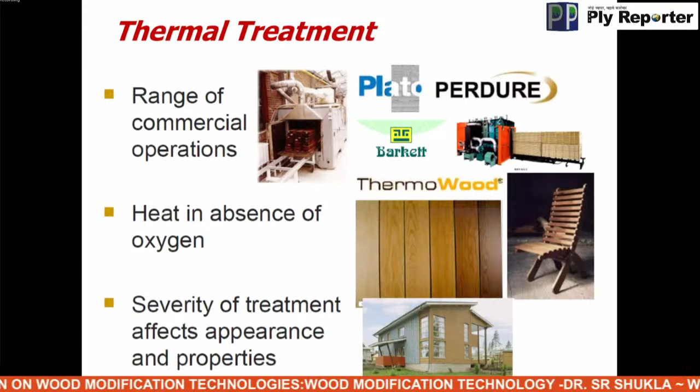Then thermal treatment, as Mr. Sanjay Goyal has already given details about. We subject the wood to a very high temperature in the range of 180 to 200 degrees centigrade in the absence of an oxygen environment, and then the wood changes color, becomes dimensionally stable, and also much more durable compared to untreated wood.

And then impregnation and polymerization. I will not talk much about this because Andy Pitman is going to give better insight into the industry and the process. One of the chemicals used is called dimethylol dihydroxyethylene urea, DMDHEU, which is used commercially as Belmadur chemical, developed by the BASF company and commercialized by them.

This is a technology they use for treatment with this chemical. Then there's impregnation with Indurite, a commercial name for a starch-based treatment developed in New Zealand, brought by the Osmose company. This is also regarded as wood into wood, because starch is also a component of wood. So when wood is impregnated with starch-based chemicals, this gives modified wood which is very good in different properties.

This is an enzymatic treatment, where Laccase is used as the main precursor, and wood active sites are treated with this. This is not commercially exploited yet, but this method is available for wood modification treatment.

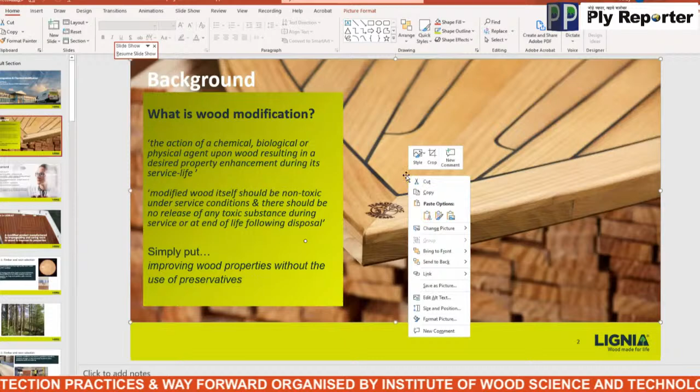Wood modification's actually been around for a very long time. The initial technologies, the science, dates back to the 1920s. Things like acetylation and thermal modification date back to that period, and similarly resin modification dates back to the work done in the US by Stamm back in the 1930s.

Wood modification is a very broad, all-encompassing expression. It's the action of any chemical, biological, or physical agent on wood which results in a desired property enhancement during its service life. Modified wood should be non-toxic under service conditions, and there should be no release of any toxic substance during service or at the end of life following disposal.

Simply put, it's improving wood properties without the use of wood preservatives. Modification has been adopted primarily in Europe, and the reason for this is there were changes in legislation regarding the use of wood preservatives, which meant it was much more difficult to use traditional wood preservatives, so alternatives were sought. This is why wood modification came into the market. It was primarily driven in Europe and mostly by the Scandinavians, Germans, and French, who were particularly concerned about biocides.

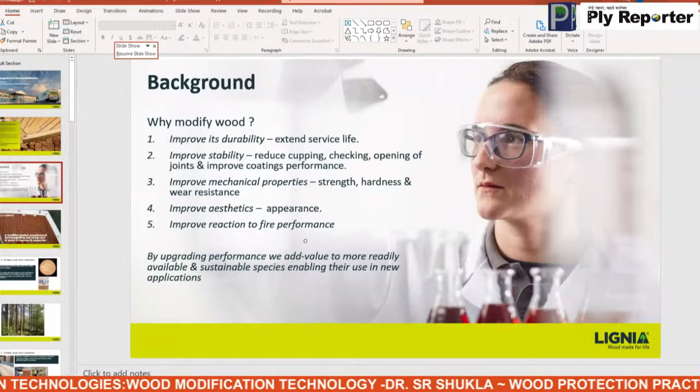So why modify wood? The first thing is it improves durability, giving a longer service life for wood products. It also improves stability, reducing cupping, checking, and opening of joints in windows and doors, and gives much greater coatings performance. For some modified woods you get an improvement in mechanical properties, making it stronger, harder, and more wear resistant. It can improve the appearance of wood - Sanjay showed some nice photos earlier showing how very blonde or light coloured woods darken with thermal modification - and it can improve fire performance of wood.

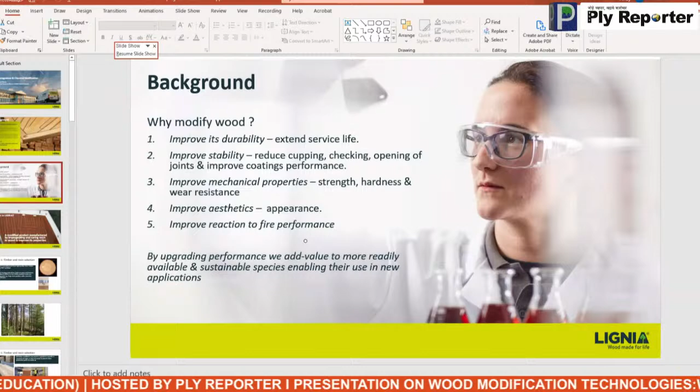So by upgrading performance we add value to more readily available, sustainable species, giving them new applications. So I'm going to talk about resin modification first. What is Lignia? It's a modified product manufactured by impregnating and curing resin in wood to improve properties.

Just a little bit about the process. Lignia is manufactured from high quality clear timber that's FSC certified, meaning it's all sustainably sourced. That's important for customers because at the end of the day you're providing a product without any preservatives in it, but you need to demonstrate that the timber is from sustainably grown forests. There's a grade which limits things like knots, resin pockets, and splits, so all the wood used is good quality.

These are the types of plantations the timber is derived from - radiata pine forests in the southern hemisphere, fast growing, typically harvested at 30 to 40 years. It's graded at the sawmill before export, and also graded at the plant. You can see here the packs being prepared - the pieces are being separated by sticks before impregnation with resin.

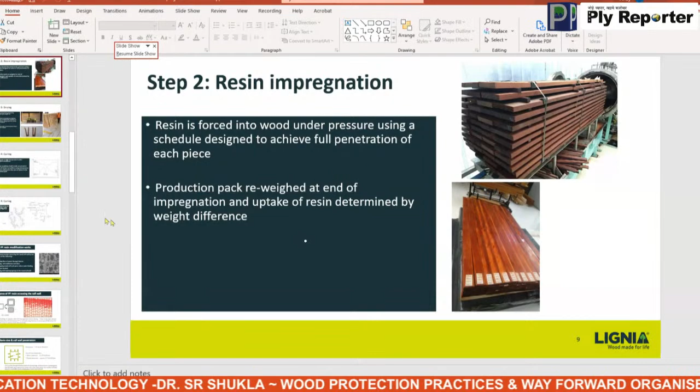Following resin impregnation, the packs of wood are dried. Our kilns have weigh beams, so we can monitor the weight of the pack over time and determine when it approaches fiber saturation point. Some of the guys this morning talked about case hardening, so we also conduct lots of prong tests through the process, and we dry the wood down to a point where it's ready for cure.

Similar to Sanjay's process, we heat the timber under controlled conditions. We monitor the temperature not only in the vessel, but we have probes that go into the center of the timbers in the middle of the pack to show that we've got up to temperature. At a specific temperature, there's a reaction that occurs and the resin polymerizes and stays fixed to the wood.

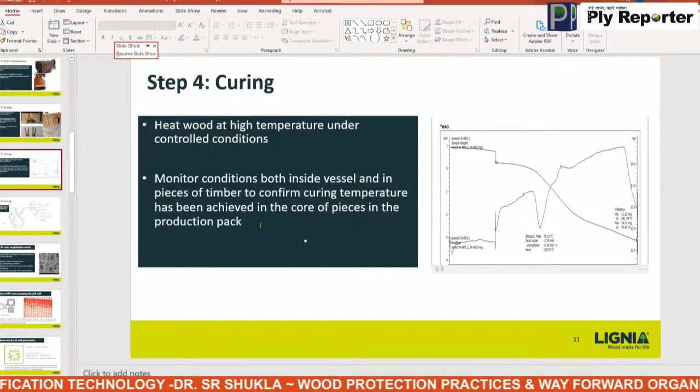So you take the resin monomers, and as you heat, you remove water via a condensation reaction. Then you remove some of the formaldehyde to form methylene bridges, so you've got the phenol rings joined together by these methylene bridges. And for the wood chemists amongst you, you'll realize the structure of this polymer is not dissimilar to lignin.

So how the resin modification works is still a question that we have a PhD student working on. We know some of the resin stays put in the lumens in the middle of the cells and cures there, so some water blocking might be a result of this resin. We know that some of the resin coats the interface between the lumen and the wall.

Just to show here, once we've treated the wood and dried and cured it, it stays in the swollen state, so it's bulked. So we know some of the resin ends up actually in the wood cell wall. Some early work way back in the 70s labeled PF resins with bromine and then looked at finding the bromine, which showed that it had penetrated the wall.

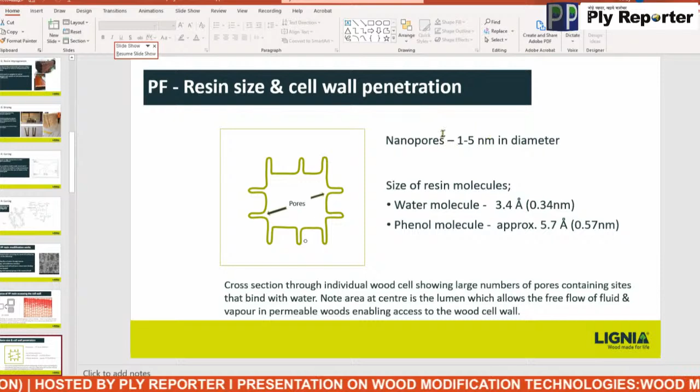In terms of what makes wood swell and shrink, it's as water accesses the hydroxyl groups in the cell wall. We know that the nanopores can be 1 to 5 nanometers in diameter. We know the size of a water molecule is typically 3.4 angstroms, and we know that the phenol molecule is a little larger, about 5.7. We know that some of the resin molecules actually get into the wall and into these pores.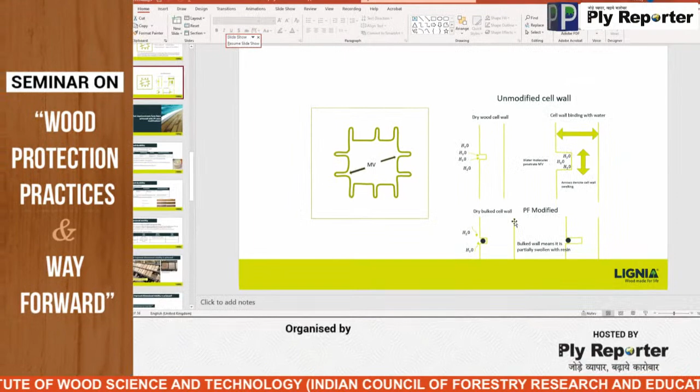What actually happens normally with wood is the water accesses these pores and leads to binding of the water with the wood cell wall and swelling. With the PF modified wood, you'll notice the cell wall is somewhat thicker, it's bulked, and this means when water is added you have less swelling of the wood.

So let's look at the properties which are improved. Well, in India, you have the full range of decay organisms. You have termites, wood-boring beetles, and decay fungi, and you have an ideal climate for decay, so natural durability is very important.

Typically we use tests that are used to assess wood preservatives or timber durability. We've tested against the European standard and the American wood preservative standards, largely because those were the markets for the product. Against fungi, in both cases, it returned excellent results. It's very durable, highly resistant, so it's equivalent to teak heartwood.

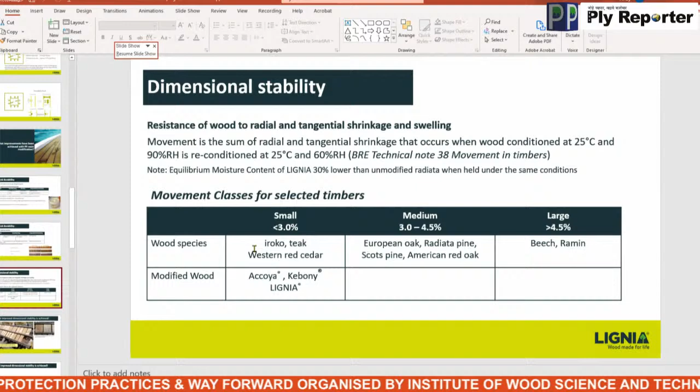You'll see here's an example of a small movement timber, teak or western red cedar, and these are the modified woods. So Accoya, Lignia, Kebony, and indeed the Thermo woods would sort of be in this range or in the medium range, but mostly in this range.

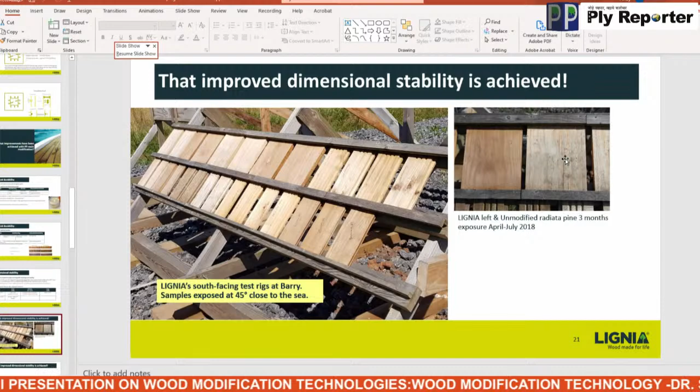So the improved dimensional stability is achieved. These are our rigs, they're 45 degrees, they face the sea. You can see this is a piece of lignia on the left, and this is a piece of unmodified radiata pine on the right. You can see the discoloration from mold growth, and splits or checks in this piece. Similarly here, this is the lignia, this is the unmodified wood, and you can see the difference - the cupping compared to the lignia.

This is quite important, and Sanjay showed some lovely slides earlier, because our process not only impregnates with resin, but there's heating, around 150 to 160 degrees centigrade. You get some darkening of the wood. So this is a section through a piece of lignia, and you can see the color runs through the section, and this is planed off. So you can see it resembles more a tropical hardwood than pine.

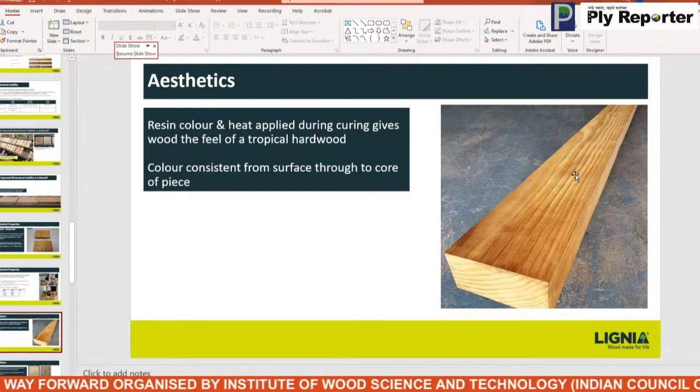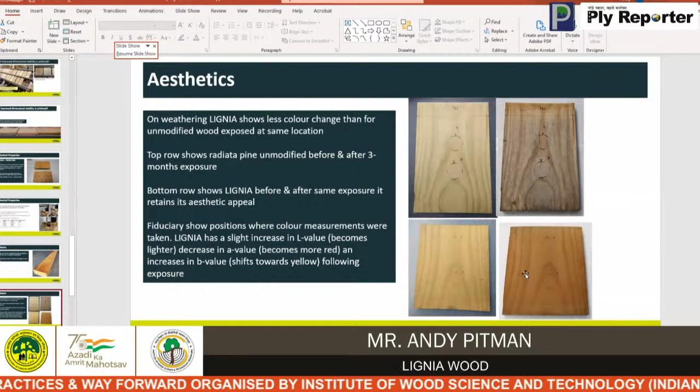One of the unusual things with resin modification with PFs is that it actually gives some color stability. Whereas thermally modified or acetylated woods outdoors grey relatively quickly, this is not the case with resin modified woods, which tend to retain their colour for far longer. So on the left here, this is unmodified pine, and this is after about 3 months - you can see it starting to weather. This is lignia before and after. So it does change colour, it darkens down, but you see it hasn't started to grey. So that's the resin modification.

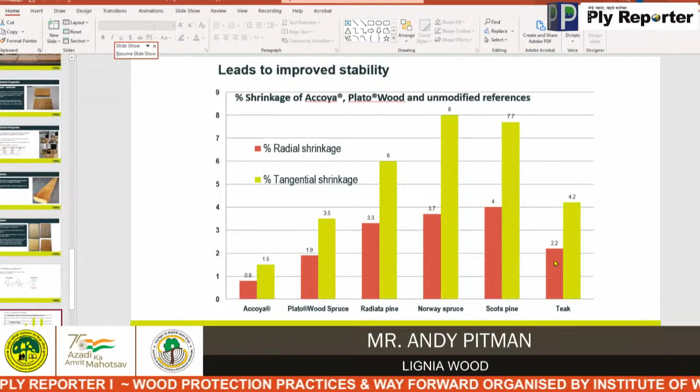Again, let's have a look at some of the properties. This shows how much it improves the stability. These are radial and tangential shrinkage and swelling values. These are unmodified woods over to the right. You can see teak, which is prized for its stability, has a radial shrinkage of 2.2%, tangential is always a bit more, 4.2. These are the modified woods. If you look at Accoya, it's far more stable than teak - about a third the shrinkage and swelling of teak. I've put in Plato wood, which is a thermally modified wood, and you can see that this is better than teak, but nowhere near as good as Accoya. So this was in the same test.

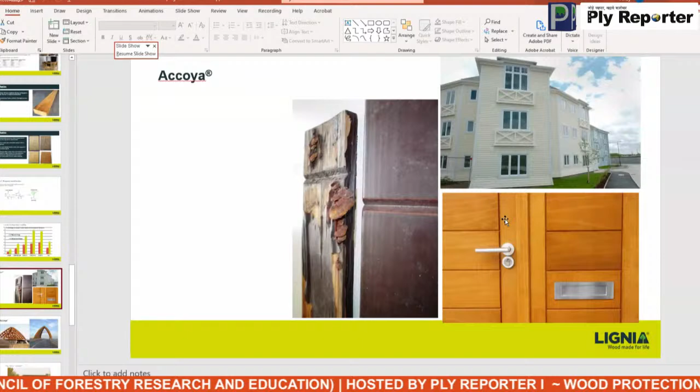So what does this mean? Well, it means coatings last for a lot longer because you haven't got the shrinkage and swelling of the wood. You don't get minor fissures in the coatings which allow access of water and coatings peeling. So these are test samples - one is unmodified, the other is acetylated wood, the same coating exposed for the same amount of time. And you'll see that the unmodified one has fungal degradation and the coating failing. And these are projects coated with Accoya, and you can see the paints - they can be stained or painted with a full coating.

One of the most interesting things that Accoya have done is they've demonstrated that their modified wood can be strength classified - given a strength classification once graded. The process doesn't degrade the strength, so it retains the strength. And it can be laminated together to form large pieces.

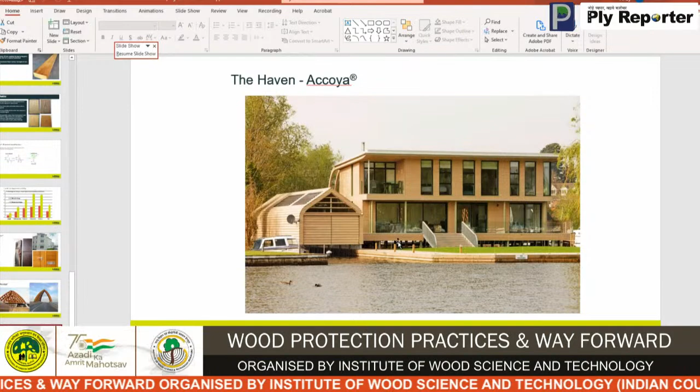And this is called the Haven. It's a building on the east coast of the UK. So Accoya is used for the decking and for the facade. And again, it's expected to give at least 60 years service life.